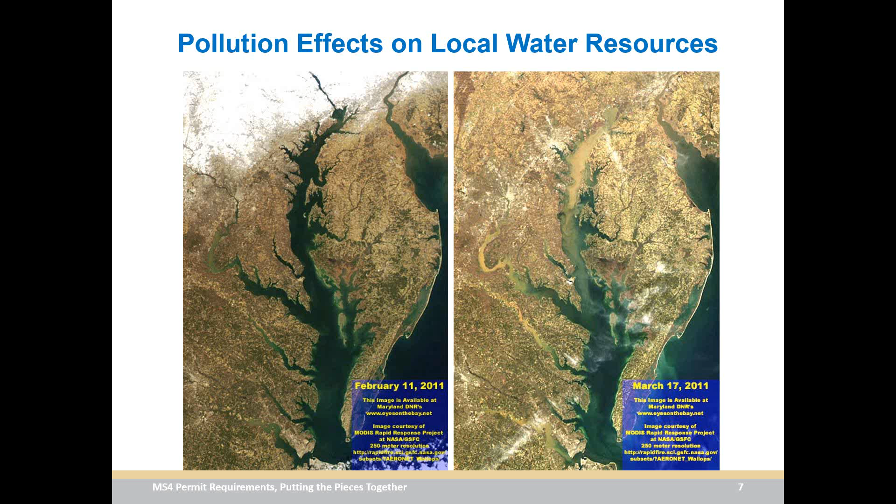This is just a great shot of the bay from a couple years ago, before and after a major event, and you can see just from left to right the amount of pollution and sediment that was transferred just in this one individual event.

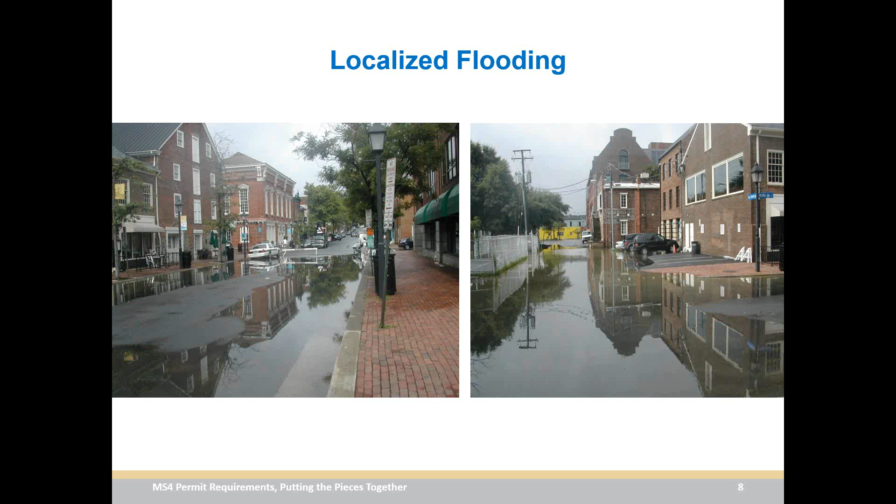So this is why. And it's not just the major flooding events, it's the localized flooding events as well. I'm sure a lot of you out there have that street that every time it rains, it's shut down, or every time you get complaints from a certain neighborhood because the basements are flooded or the inlets are clogged. Localized flooding can be a real problem in some of these municipalities.

There's also the extreme event flooding that we get. I believe these are from Tropical Storm Lee, and granted, these are a more extreme idea of what the flooding is that we're hoping to control with some of these requirements, but it's all things that as municipalities we're thinking about and we're concerned about.

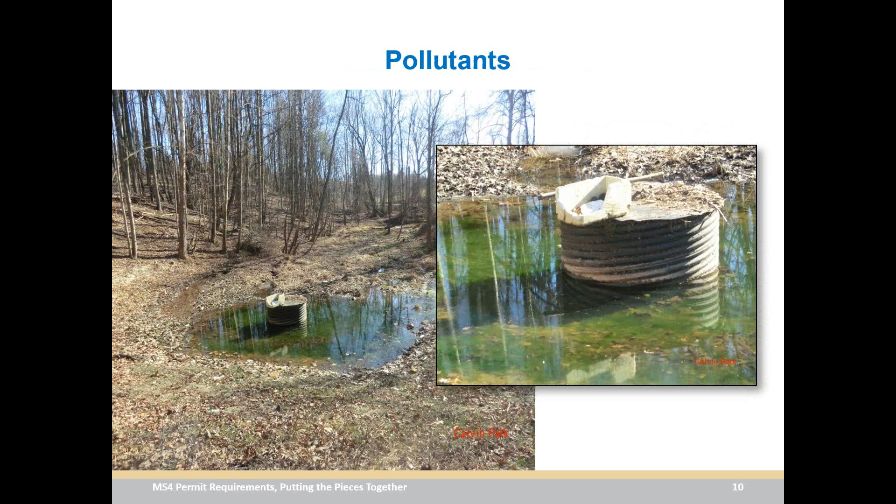But like I mentioned before, one of the big things we're going to talk about today is the pollutants. I took this picture for a client, and we still never figured out what all that green stuff was around their riser, but at this point I'm not sure I want to know. But the point is you've got a lot of things going on in your streams.

You're going to have a lot of sediment buildup in a lot of your facilities, and the question is, what steps can we take as municipalities to really reduce this at the source, try and have less water, less pollutants, because it's going to be a lot cheaper to deal with it at the source than it is to try and remove things afterwards. That costs a lot more money, and by the time things get to the bay, we're just talking about such a massive quantity that it's not going to make sense.

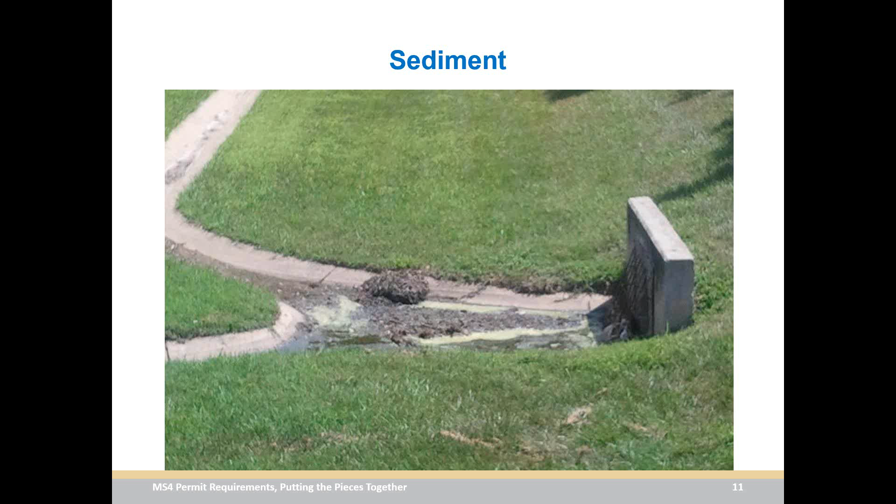We really need to be looking individually in our own backyards and our municipalities to see what's going on. So a lot of you are already looking at your watersheds in Pennsylvania. You're already trying to do your assessment to figure out what your goals are. And some of them are a little more obvious than others.

You want to improve your water quality. You don't want to have as many pollutants. You want to reduce the flooding that you get, that localized flooding we talked about from your common rain events. And it's not just about repairing the troubled areas at this point, but you also want to protect the areas that are still good.

And obviously, we do have a lot of regulatory requirements, so we're going to do that. But when you put all these things together, all of us are really looking at improving the overall watershed health in our municipalities, because that does help benefit the Chesapeake Bay as well.

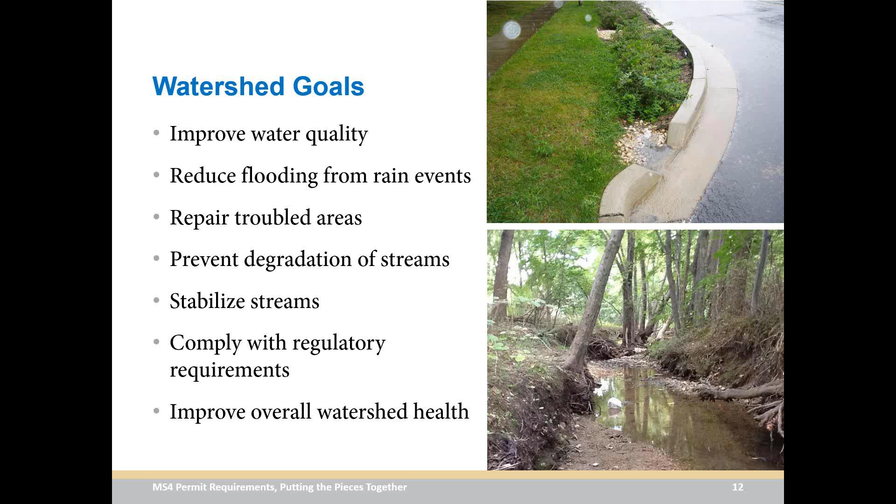So what are the benefits to having a strong stormwater program? Well, these are just some of the ones that we've found that are important to folks in Pennsylvania. Fishing and boating and recreation, these are all things that people enjoy. And we're not going to dwell too much on these because, as a lot of you know, it's not just about meeting the requirements. It's also about doing the things that benefit your community as a whole.

And when you have improved environment, that's generally when it tends to be improved economic situations as well. So it's important to a lot of people for a lot of reasons.

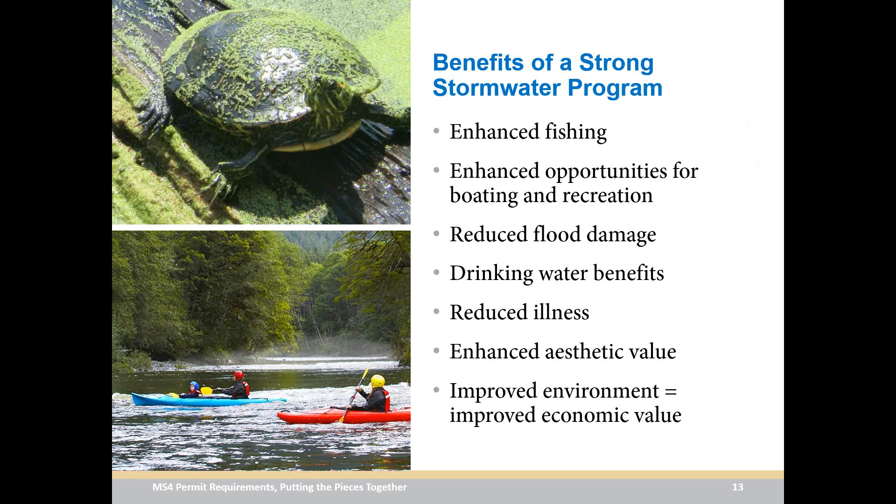So since we are in a regulatory environment and we are talking about MS4 permits, let's get in and see why it is that we want to do this. In Pennsylvania, your NPDES permit is administered by the Pennsylvania DEP. And you can see here we've got a lot of regulatory requirements starting at the very big umbrella of the EPA Clean Water Act and really coming down to some of your local requirements.

Now, because we're talking about Pennsylvania's new MS4 permit for smaller communities and municipalities, there are going to be two things that we're going to focus on later that are different from before. That's the Chesapeake Bay Total Maximum Daily Load, or TMDL, requirements in the form of a pollutant reduction plan. You can tell we love acronyms in this business. So when you hear me talk about the TMDL, that's basically the pollution diet that the Chesapeake Bay has been put on.

When you hear us talk about PRPs, or pollutant reduction plans, those are things you'll specifically develop as part of your permit to meet those requirements. Pennsylvania also did a watershed implementation plan that we're going to discuss. That's how they break it down by state and municipality. We're also going to talk about some local TMDL plans, because some of you probably have TMDLs on streams that have nothing to do with the bay. Maybe you have one for bacteria, maybe a different one for sediment or PCBs. We're going to talk about those as well. But these basically give you the regulatory requirements that are driving a lot of the actions the municipalities are going to be taking.

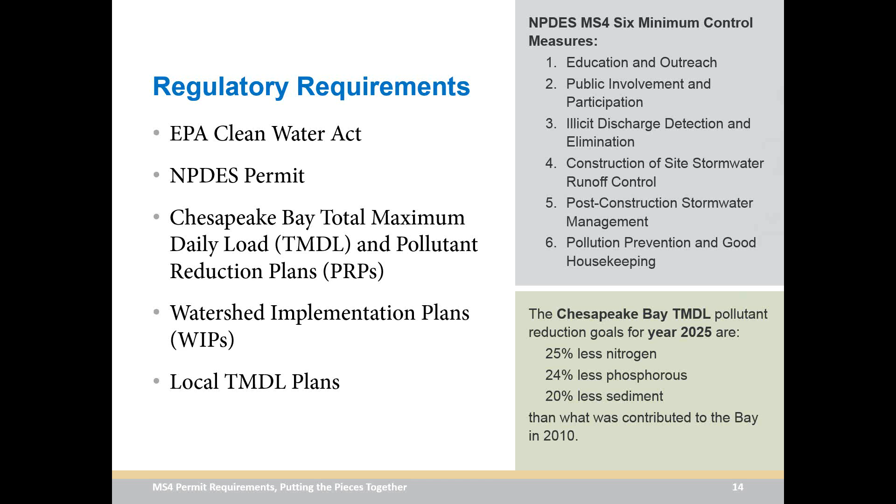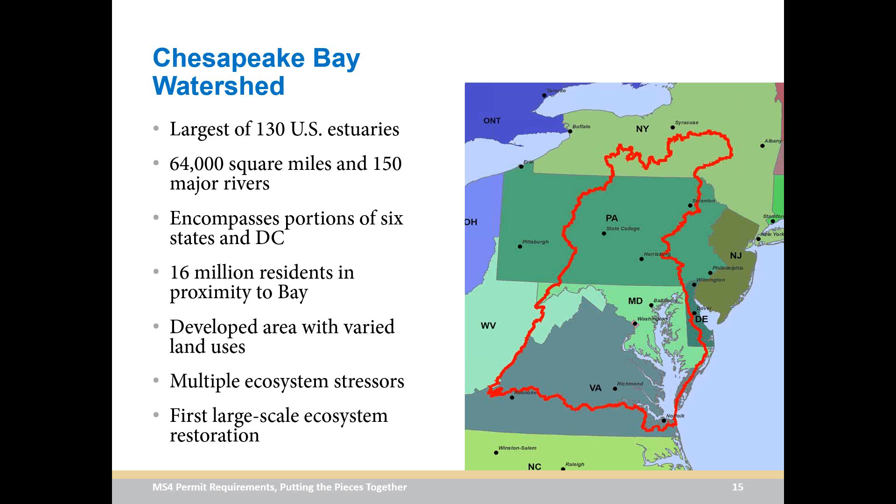Now, this is nothing new. There's been a lot of restoration efforts in the bay to date, starting back in the 30s and leading up to today when we talked about this Chesapeake Bay TMDL coming out. The important thing I hope you can take away from today is what this Chesapeake Bay pollution diet is. What this means is, back in 2010, when everybody, the 6 states and the District of Columbia, agreed on this TMDL, there are 3 things they said they were going to put the bay on a diet for: sediment, nitrogen, and phosphorus. So those are really the pollutants of concern when you're talking about the bay TMDL.

And you, in Pennsylvania, your MS4 permit is going to help you figure out how to comply with the requirements of that Chesapeake Bay TMDL. Pennsylvania is not unique in this. A lot of the other states are also putting their Chesapeake Bay requirements out through the MS4 permits, because it's the most effective mechanism they've found for getting people to comply and getting everybody on the same page with their reporting and requirements.

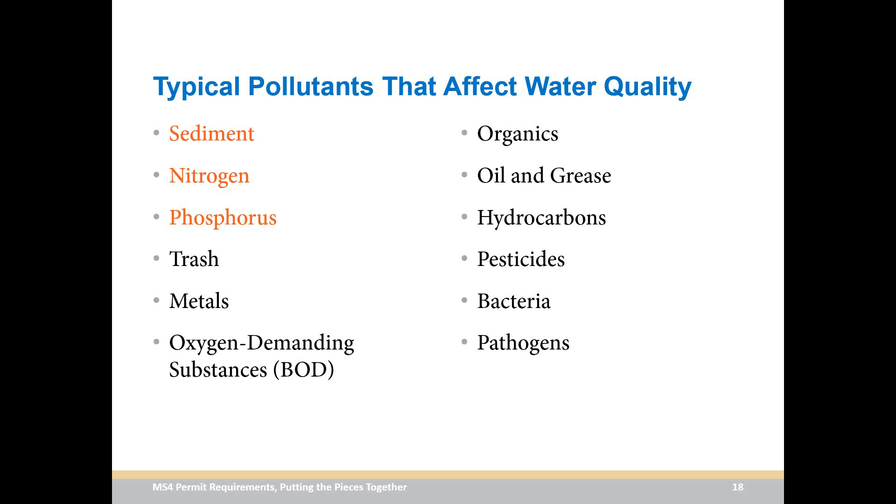So there are other pollutants that can affect what's going on in the bay. Like I said, I've highlighted those top 3, but you also might have some other ones that you either have a TMDL for or just know you're concerned about. Everybody's concerned about trash. Sometimes you'll see people with TMDLs for bacteria, maybe some other organics. But these are typically the things we're looking at when we go in and do a watershed assessment to see what's affecting your water quality.

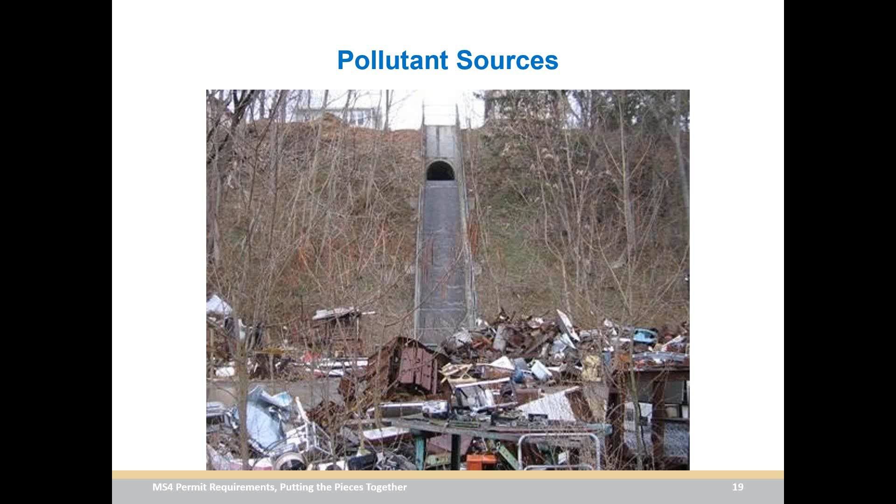So anybody out there have an outfall that looks like this? I hope not, and I don't remember exactly where this picture was taken, but I hope they've cleaned it up a little bit by now. This is more commonly what we see after the big rain events, and you've got a lot of stuff going on. I think probably all of you have had an outfall that looks like this at one point.

So in keeping up with the Chesapeake Bay TMDL milestones, these are for the entire program, so they have target reductions to get to by 2025. But the more important piece are the reductions by 2017. What they're basically telling the states is they want 60% of those BMPs that you're going to put in place to get these reductions implemented by 2017. And then everybody's going to have these reporting milestones every 2 years. They're going to be giving annual reports based on your pollutant reduction plan and complying with the WIP. So those are some of the big milestones that, again, will be spelled out in your permit.

The WIP, or Watershed Implementation Plan, that you heard me mention is something Pennsylvania has also participated in. Again, they're not alone, a lot of states have done this. But it's basically a roadmap to show how we're going to get to where we need to be by 2025, with those interim dates of 2017. There's a great website that shows the planning targets for Pennsylvania. So this is something you could check out, these are just some of the examples we have from some of the municipalities we dealt with recently.

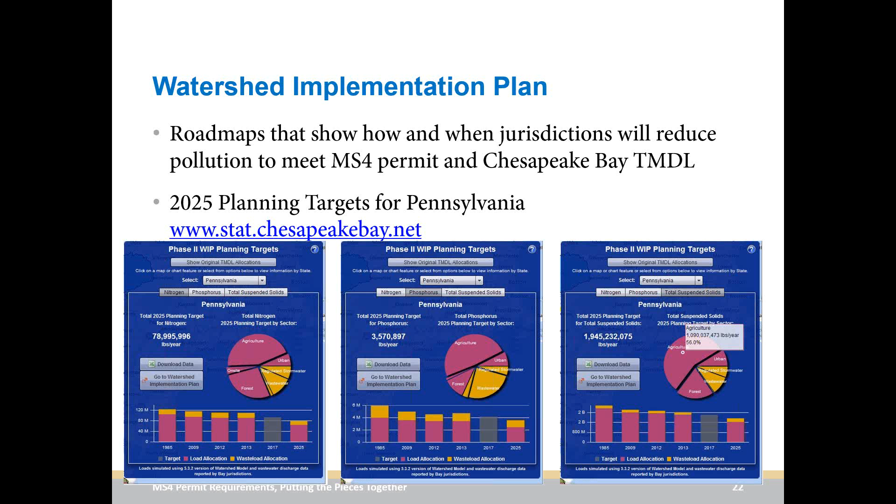So within the WIP, you get some county-level planning targets as well. These were developed by DEP, and they're guidance for how you're going to achieve what everybody's trying to achieve. They're currently pretty flexible. DEP is not requiring specifics on a lot of these, but it's important for you to know what your waste load allocations are, how they're going to be subdivided. Basically, you're going to want to tackle the low-hanging fruit first.

Not one of my favorite expressions, but it's true. You want to really try and see what you can achieve right off the bat for the least amount of money, and then you move on to some of the other things that you need to do on these planning targets.

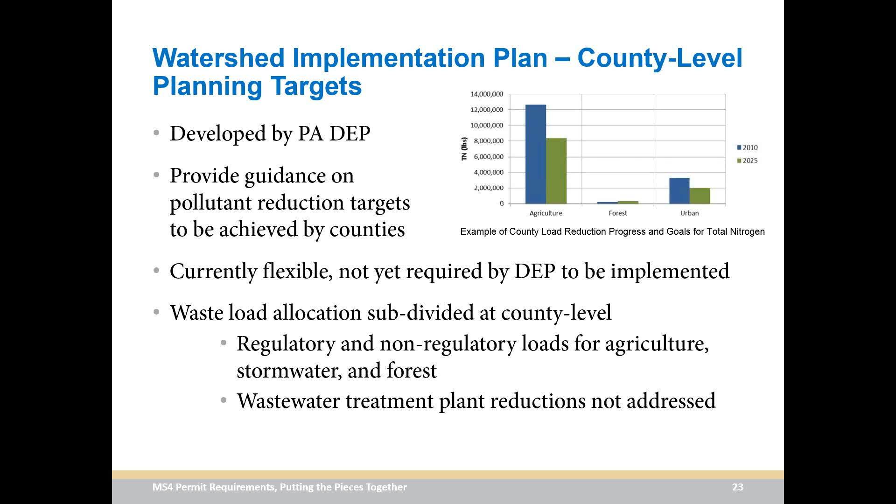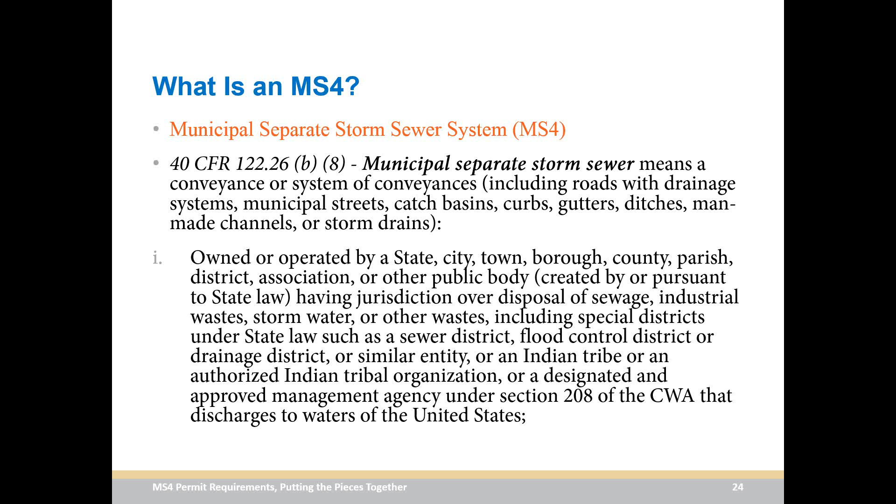So this slide I left up here because it's completely obnoxious as far as the definition of what is an MS4. You've heard us talk about this MS4 permit. So it's a municipal separate storm sewer permit. And as you can see, that means you have a conveyance, and there's a whole bunch of things, criteria that go along with it. And again, I left all these words up there just to show you that there is a pretty lengthy definition, but the bottom line is it's defined in your permit as the portion of the MS4 located within a designated urbanized area, and it's designated by DEP.

So if you have questions about whether you are an MS4, whether you're still an MS4, whether you used to be an MS4, those are things that you're going to want to contact your local DEP representative to discuss. But for the purposes of this webinar, we're going to assume that everybody here has an MS4 that they're concerned about.

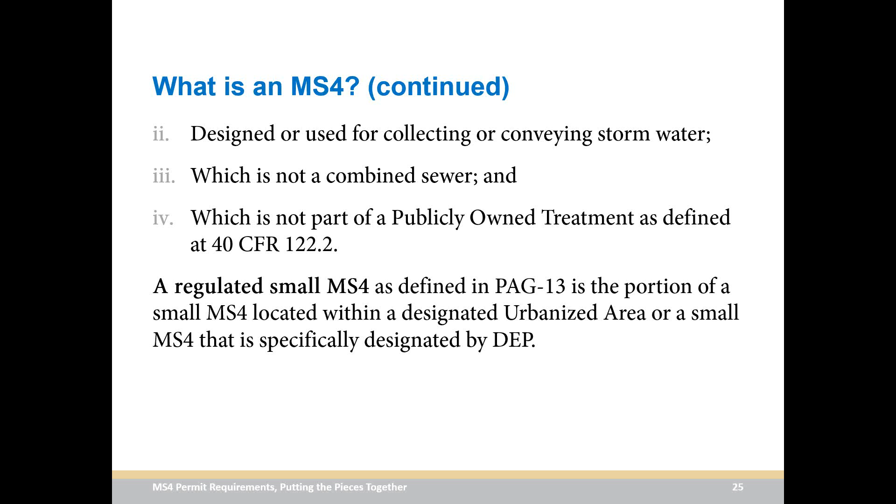Another question we get a lot from clients is, what is an outfall? Now again, you need to use the definition in your permit, but what you can ask yourself is, do I have a point source? Is it discharging from my MS4, and is it discharging into the waters of Pennsylvania or waters of the U.S.? And if you answered yes to these, then it's an outfall. If you aren't sure, again, I'm going to refer you to DEP for their guidance because they are the ones that are administering your program.

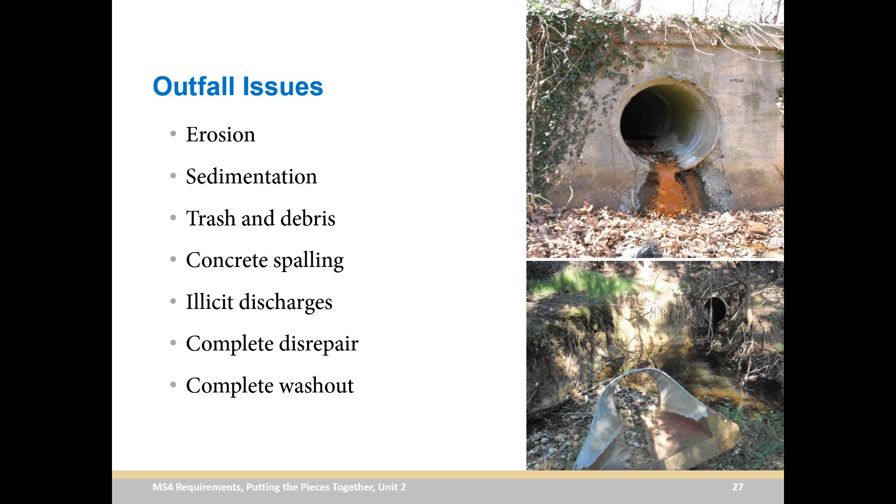Just some examples of some outfalls that are not in the greatest of shape. A lot of outfall issues that we will see, you get erosion around them, you get a lot of sediment deposition because of the things that are coming out, trash and debris because anything that's in those pipes is eventually going to dump out right there in your stream, and then you will get some that are in complete disrepair. But these outfall issues should clue you into the fact that you've got some things going on upstream that we need to be worried about.

So going back to the MS4 permit, what you're going to hear us talk a lot today about is the Phase 2 general permit, and that's for the smaller municipalities. Who needs one? Probably you do. Again, if you're in an MS4 area, and we're going to stick with that for the purposes of today, you most likely need one.

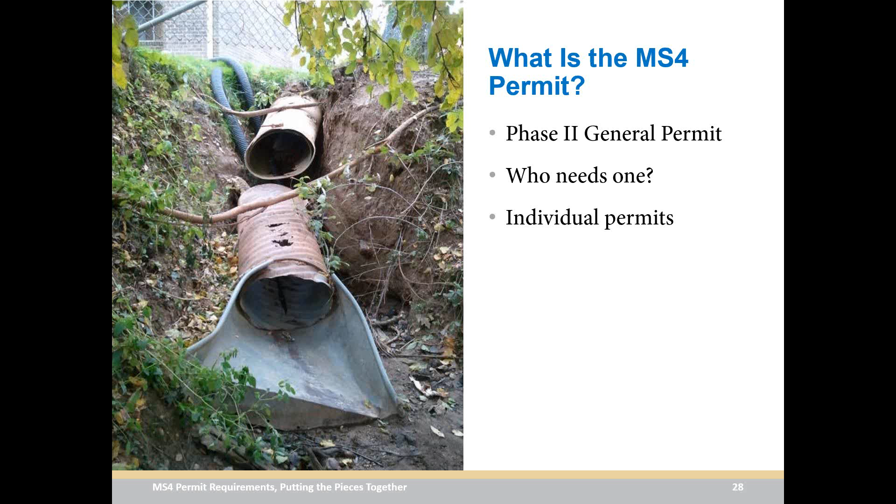Now, there are also individual permits that Pennsylvania administers. Most likely you already know if you're required to have an individual permit if you have some special protection areas, or if there's anything significant about the waters that you're discharging. You probably already know if you need an individual permit. Again, you can always check with DEP if you're not sure.

And this new permit, what does it require? We're going to talk about implementing a strong stormwater management program. Important that you track progress toward the goals of your program, and you've got to report that progress. I had someone say to me once, if you don't write it down, it didn't happen. So it's really important that you're tracking this progress towards your goals and reporting it in your annual reports to DEP. And it's going to take more labor hours than before, not just for the reporting, but for the maintenance, the upkeep, the O&M, the work. So it's just something that when you're planning your budgets, you're going to need to be prepared for.

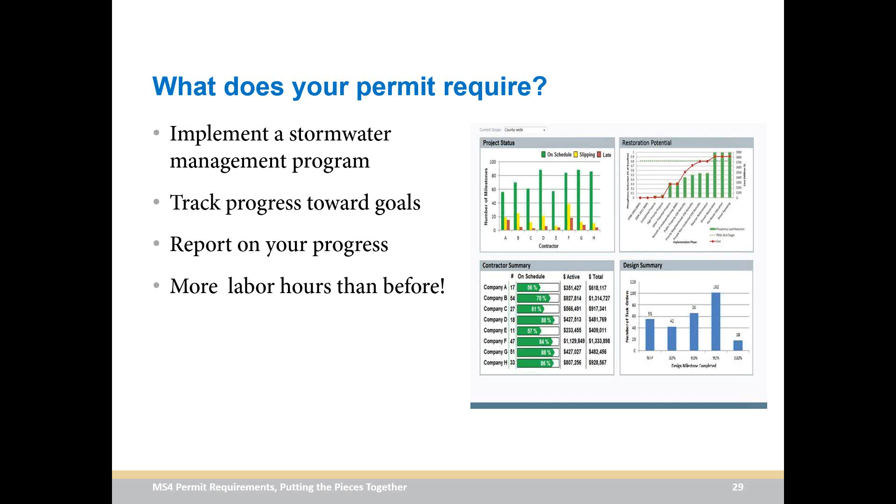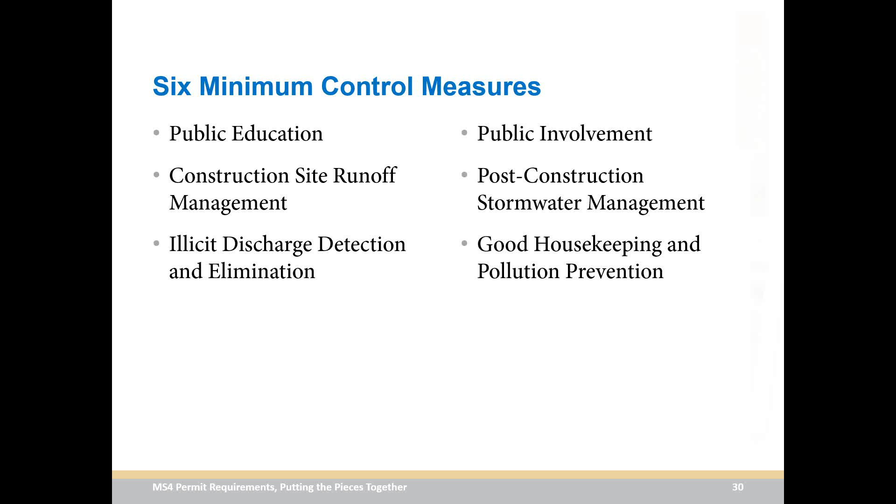I was just going to go quickly over the 6 minimum control measures. These were in your existing MS4 permit. So these are not new to you. The new things are what we're going to talk about after this. So let me quickly go through these. The first one being public education and outreach.

There are lots of ways you can develop outreach for your communities, but the important thing is to make sure that you keep track of what you're doing and report it in accordance with your permit. Whether it's the number of flyers you distributed at the local county fair or the number of homeowners you met with at certain meetings, you want to make sure you're keeping track.

Public involvement and participation is another great one, especially if you have volunteer programs that you maybe already have started or you're thinking about starting. The important thing is you want to do them not only because it's a great opportunity to get stakeholders to buy into what you're trying to achieve, but make sure you're reporting and keeping track of the meetings you're having, storm drains that are stenciled, and any events you have so that you can report that and get credit for it in your permit.

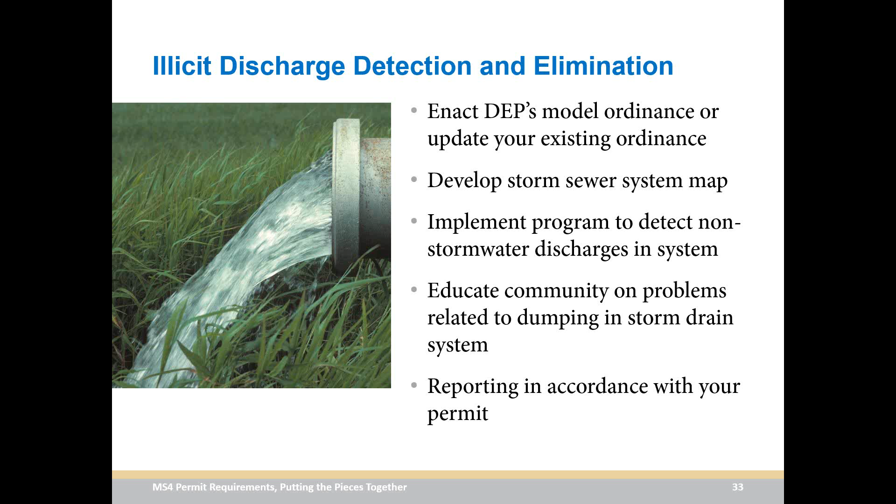I won't talk too much about illicit discharges because we could obviously spend an hour on those, but basically if you've got water coming out of your pipes when it's not raining, there's a possibility that you have an illicit discharge. You're going to need to track that with your sewer mapping. You want to make sure you report it, and if it turns out to be an education issue, you can fold that back into one of your other measures because you need to make sure people are no longer doing the activities causing this illicit discharge.

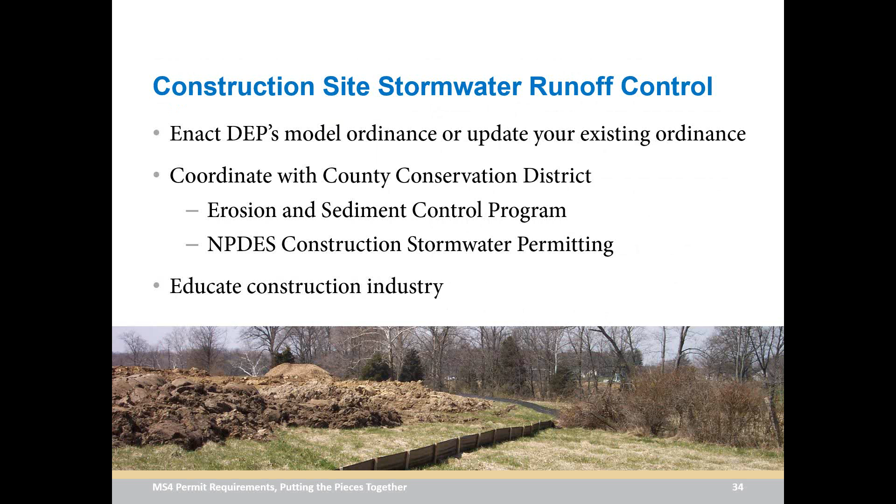Construction site stormwater runoff is obviously another big concern because we all know what it looks like when you get a big open construction site. The silt fence can only do so much. So it's all about education on this one, making sure your ordinances are in place and keeping track of what you're doing. Same thing with post-construction.

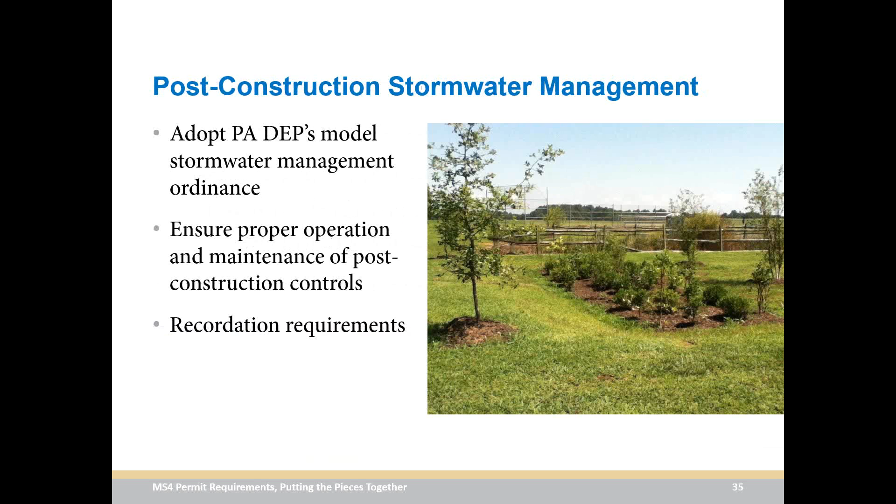Anything that needs to be recorded with your post-construction erosion and sediment control, you want to make sure you're keeping track of that, and this will keep you in compliance with the 6 minimum measures. Good housekeeping is the last one.

This is the one that everybody always seems to have the best intentions on, but it's also the easiest one for things to slip through the cracks. Making sure your employees are trained, educating anybody that's on your site and in the community, and again, reporting in accordance with your permit. This covers a lot.

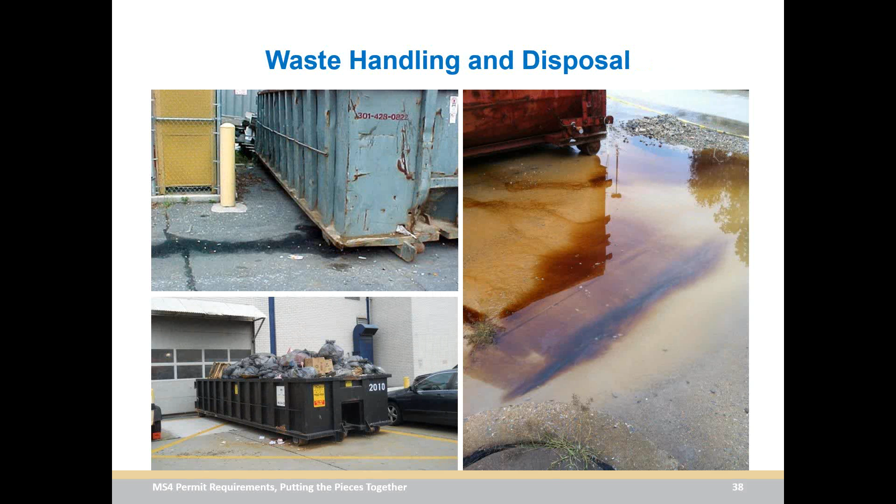I threw some photos in here just to show you whether you have equipment parking, if you're a bus depot, if you've got dumpsters on your site, maybe you're doing waste handling and disposal. There's always something here that you can improve your good housekeeping on.

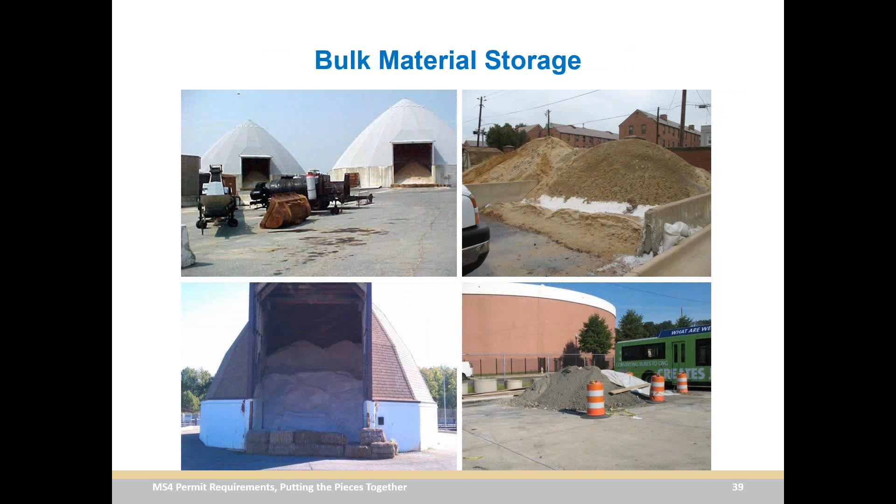At this time of year, sand, salt, cinders—I'm sure nobody even wants to think about that anymore. I think we're all ready for spring. But the point is there's always going to be things on your site that are worth taking a look at to make sure you're using the best housekeeping practices.

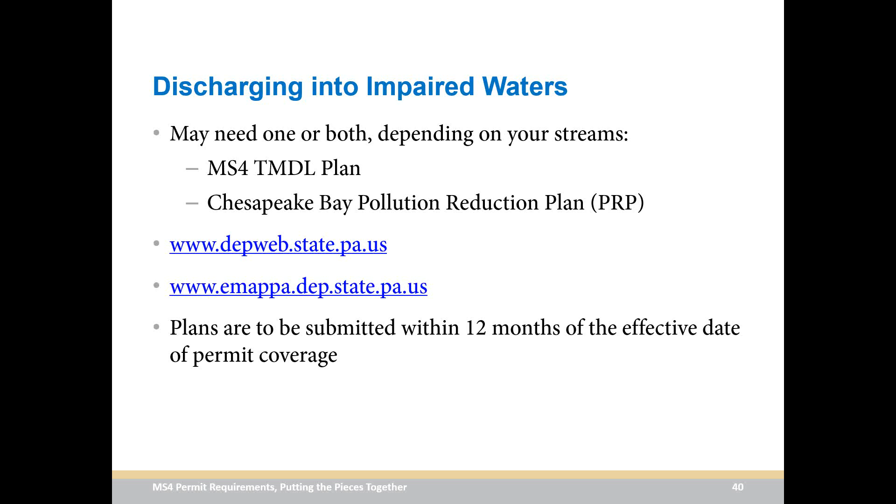The big thing you'll want to remember here is that you've got about 12 months from the effective date of your permit to put these in place. Everybody's permit effective date is going to be different because it depends on when you actually apply for coverage.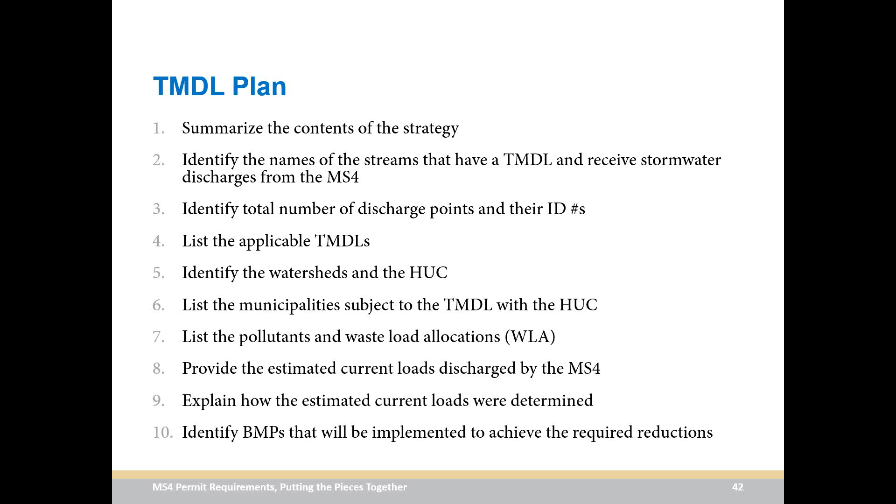If you do need a TMDL plan for an individual TMDL, you're going to want to put this plan together and describe how you're going to achieve your goals. You also need a strategy and some design details for how you're going to accomplish this. The permit lists very specific steps for how you can develop this plan. If you have questions on this, DEP is going to be your best bet since they are administering this, but it's worth your while to go through these steps based on where you are in your municipality and see where you need to be.

The Chesapeake Bay PRP is a little different. You're going to have to do similar steps, but these are all going to be related to the bay drainage and the estimate of what you're currently contributing and how you can fix that.

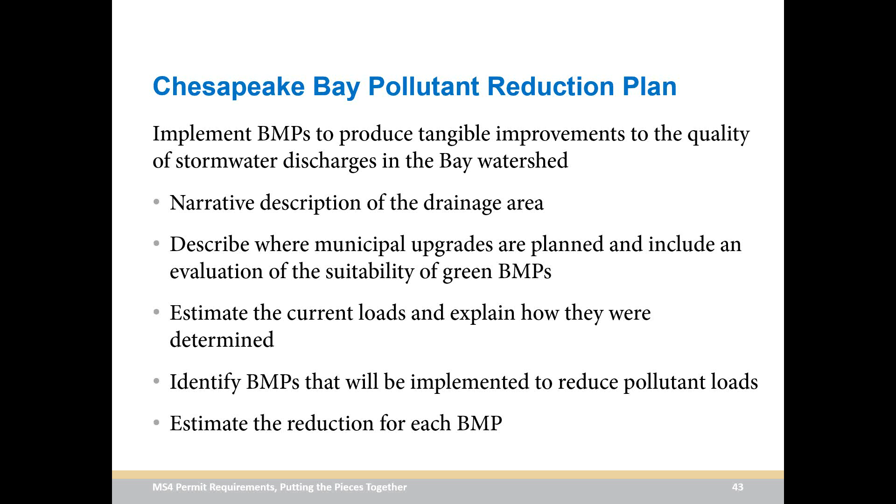So the next question we get from everybody is, how do I take on these challenges? And I'm going to let Andy discuss some of these with you.

Good afternoon. I think Melissa did a great job talking about your stormwater plan as well as some of your permit requirements. I'm going to start off talking about potential challenges. When we were out there doing our information gathering and input seminars with the local municipalities, one thing that came up quite frequently was property ownership. What am I responsible for?

If the outfall is on somebody's private property, do I have to monitor that outfall? Or if I'm doing pollutant reduction, how do I achieve a level of pollutant reduction simply by addressing issues in the right-of-way or municipal-owned properties? So if you look here, the first three bullets speak to property issues associated with stormwater. As a municipality, your stormwater implementation, retrofit opportunities, and maintenance plans are often limited by property ownership issues. Maintenance agreements, access easements, and enforcement protocols are ways to ensure these types of facilities are maintained properly.

Many of the new pollutant reduction requirements are difficult to meet, especially when you're limited to those public rights-of-way and municipal-owned properties. One way to address this is homeowner and business incentive programs. It's a different approach that increases the opportunities for new and retrofit facilities. Obviously, these work better if there's a financial driver behind it, like a stormwater fee or a stormwater utility. The last bullet is what we all end up talking about, which is funding, and perhaps the greatest challenge in this whole puzzle is finding the money to do these things.

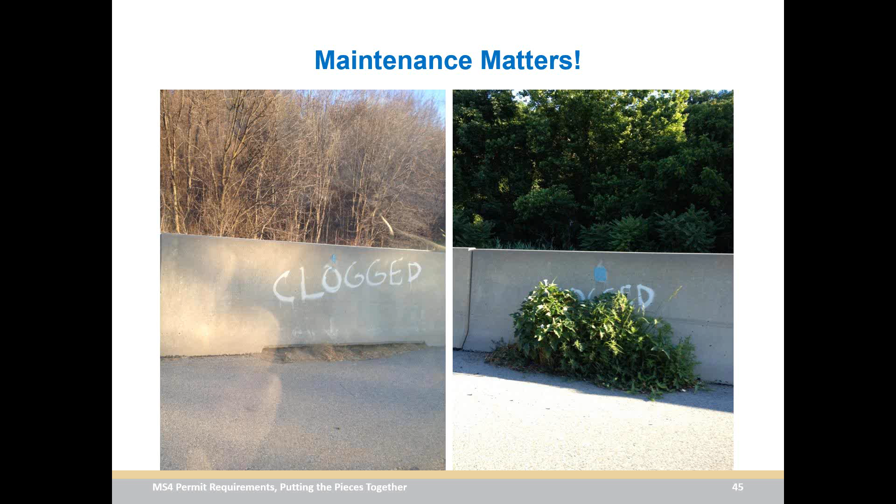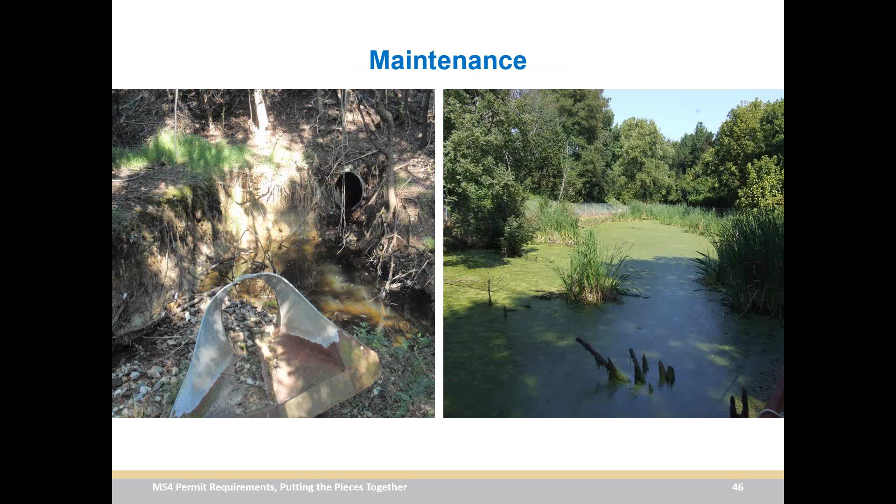As a municipality, as Melissa and I will demonstrate later and talk about later, an ounce of prevention is worth a pound of cure. Take care of it ahead of time, and you will never have to replace it, or hopefully you won't have to replace it. These pictures show some extreme examples of inlets and outfalls that have been neglected, but unfortunately they're not that rare. Non-functioning infrastructure is ineffective at serving its purpose, and in turn these types of things become contributors to polluted runoff.

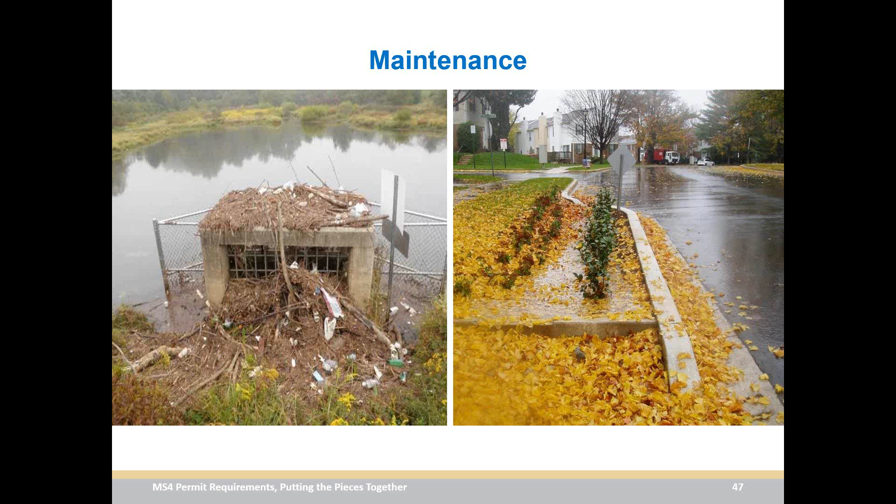The picture on the right is a prime example of good intentions. You have a great-looking, well, what would be a great-looking green infrastructure practice. I'm sure the town spent a lot of money on design and implementation of this flow-through device, but what they really got now is a really expensive leaf catcher. This facility isn't going to function because it hasn't been maintained. So in this instance, the O&M plan for this type of facility should take into account seasonal variations.

All right, so let's talk a little bit about potential solutions. We're going to talk about potential solutions in the context of developing and maintaining a strong stormwater program. Most obvious is the traditional capital improvement plans that fund gray and green improvements. However, as we all know, given the tight budgets that many municipalities face today, this budgetary line item is usually insufficient to address many associated issues.

Pollution prevention, I just talked about a little bit, but we're going to keep hammering away on it. It's far cheaper to prevent your water pollution than it is to treat it afterwards. By developing and implementing strategies to prevent, you'll be saving your town money in the long run.

The next bullet, I'll just say share the burden. Coordinate with your other local jurisdictions. Coordination can create cost savings by optimizing manpower, equipment, and materials. Talk to your neighboring towns or boroughs about a coordinated effort to tackle big problems on small budgets.

Aside from O&M, the other thing you'll hear repeated time and time again is education and outreach. Melissa's already said it several times, and I'll probably say it several more. Education and outreach is key to any effective stormwater program. We need to facilitate operational and behavioral changes.

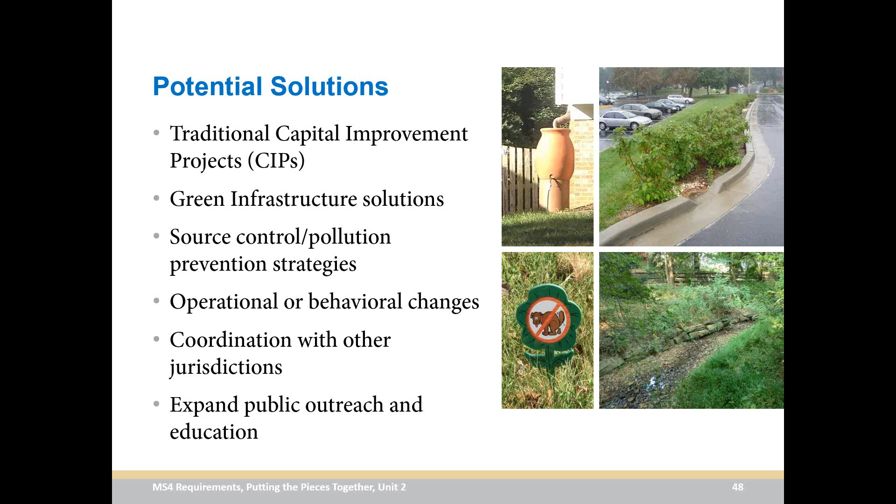These are some of the more traditional or common stormwater practices. I'm sure a lot of you out there have seen these. We'll talk a little bit about their function and purpose, and we'll talk about some of the basic do's and don'ts of maintaining them.

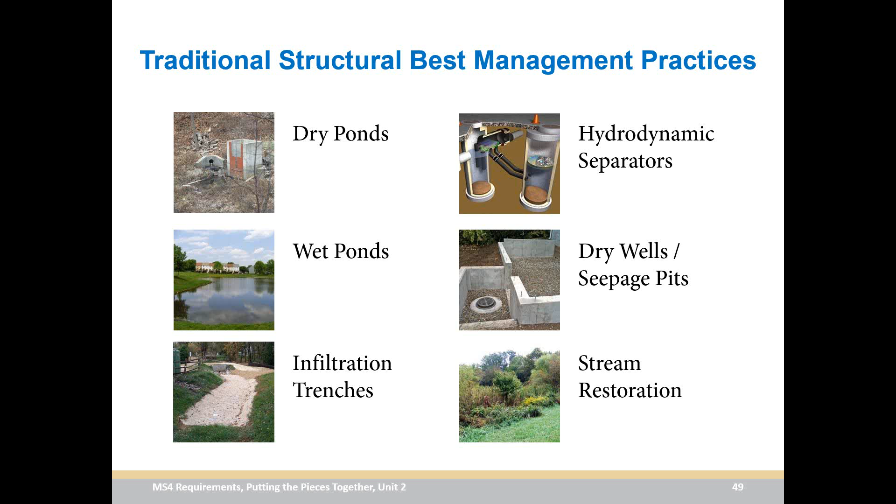From a pollution prevention standpoint, and I'll use another term Melissa doesn't like, it's low-hanging fruit. These are the low-hanging fruit of the retrofit opportunities. Our company currently works for various local and state agencies evaluating these types of facilities for retrofit opportunities. They are quite frequently the biggest bang for the buck.

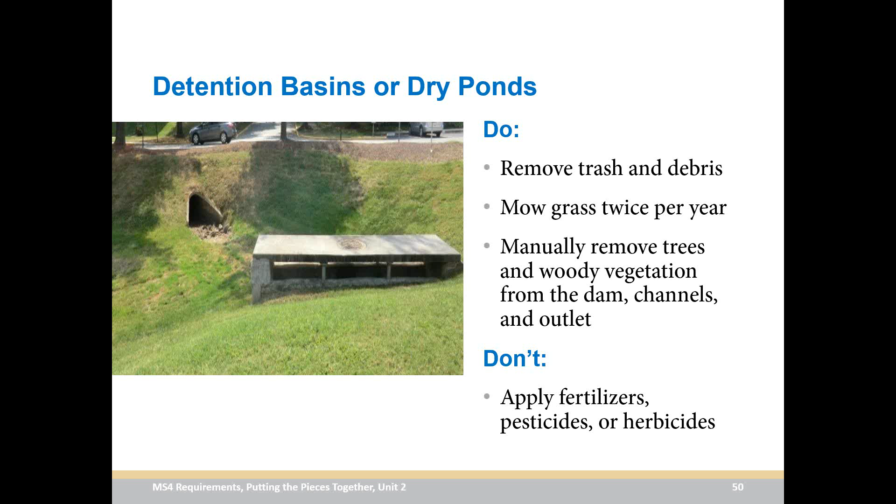All right, step up from your dry ponds to your wet ponds. Wet ponds provide both quantity and quality management. Now, the maintenance for these types of facilities is a little more cumbersome, but if you go through the do's, it's pretty common sense. The dry pond to wet pond conversion is something you may want to consider when you're talking pollution prevention or pollution reduction plans.

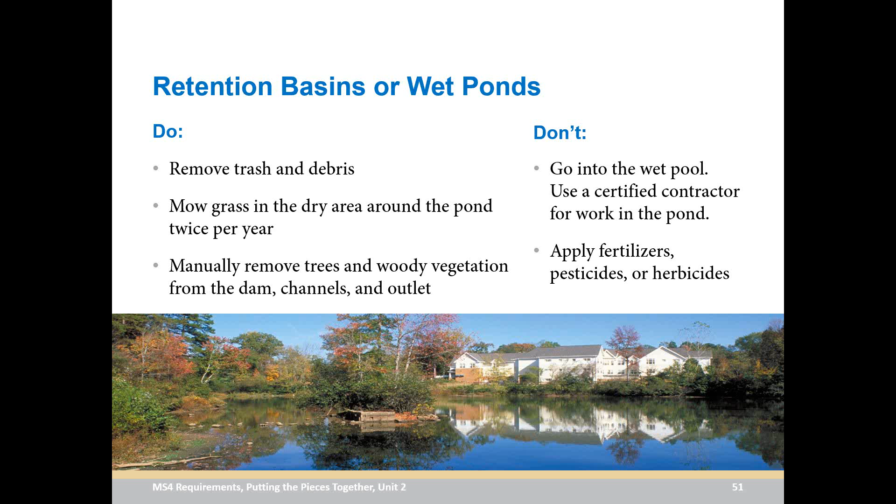Infiltration trenches, you've probably seen these. Sometimes they can be mistaken for a riprap channel. Infiltration trenches are generally sized for the first flush or 1 year frequency storm events. They're generally easy to construct. However, their functionality is going to depend on their placement and what's upstream of the facility. These facilities provide water quality through groundwater recharge. The maintenance protocols, again, I would ask you to read those. Maintenance protocols require a hands-on approach for removal of sediment and vegetation.

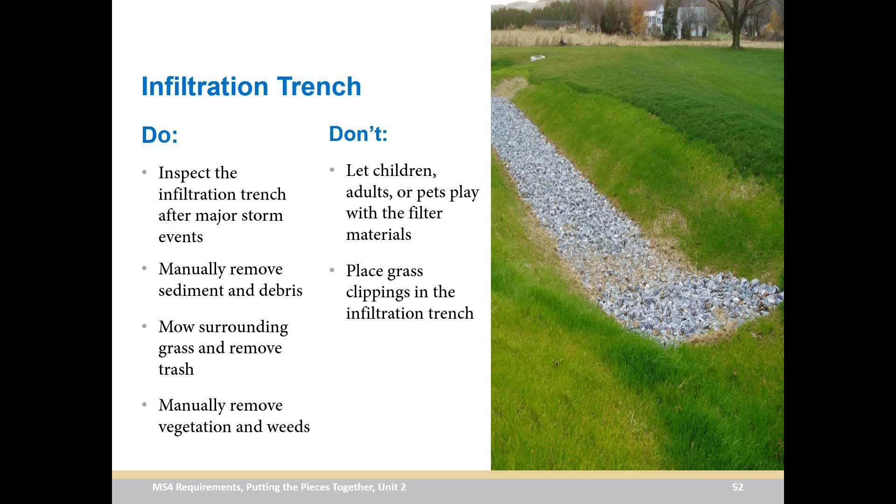Don't let children or even adults play in them. If any of you out there are parents, you know the easiest way to break something is to let your kids play in it. So let's move on to the next one.

Hydrodynamic separators. You may or may not have familiarity with these. These vault or manhole-sized devices can come in many proprietary forms. They're separators, and they do just that. They pull out the sediments and oils and greases from your stormwater runoff. Most of them have a defined maintenance program depending on who you buy them from, and oftentimes these companies will sell a maintenance package along with the unit. Generally, these are offline facilities taking first flush or small 1 year events. As with any kind of underground or formal vault type system, the upfront costs here are a limiting factor.

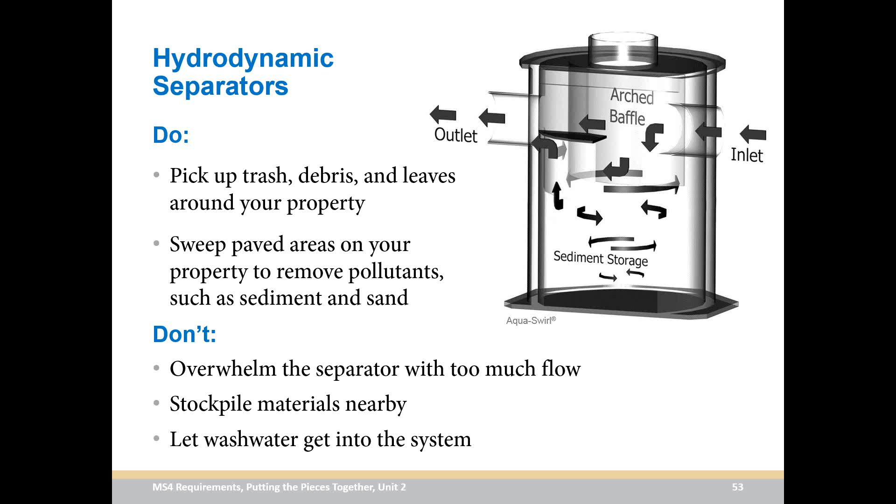Dry well / seepage pit, we'll refer to it as dry well, seepage pit, just a less appealing term. I'm sure everybody's seen these. These facilities are just smaller versions of infiltration trenches, and they become more commonplace in residential applications, serving your rooftop downspouts. Small dry wells have become very commonplace. Educating homeowners, here we talk about public education and outreach. Educating the homeowners is critical to increasing the continued functions of these types of facilities. So in this instance, you've combined O&M with your education and outreach.

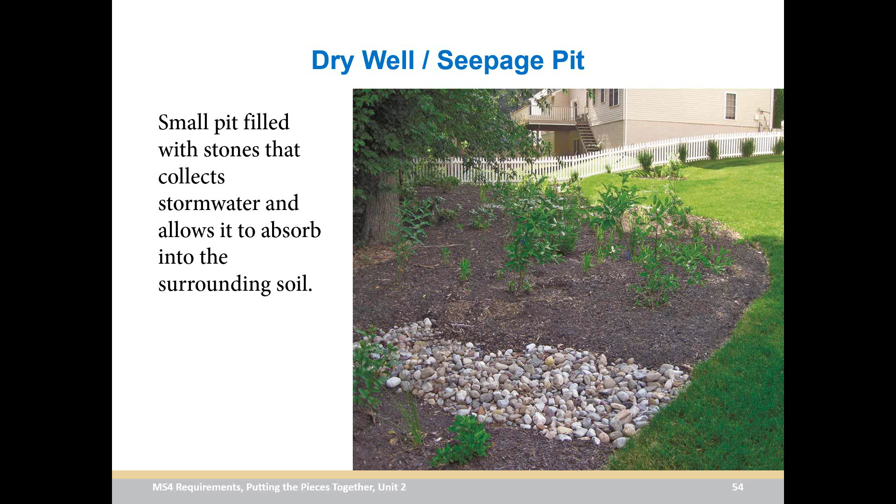There's your do's and don'ts. Again, nothing overly complicated.

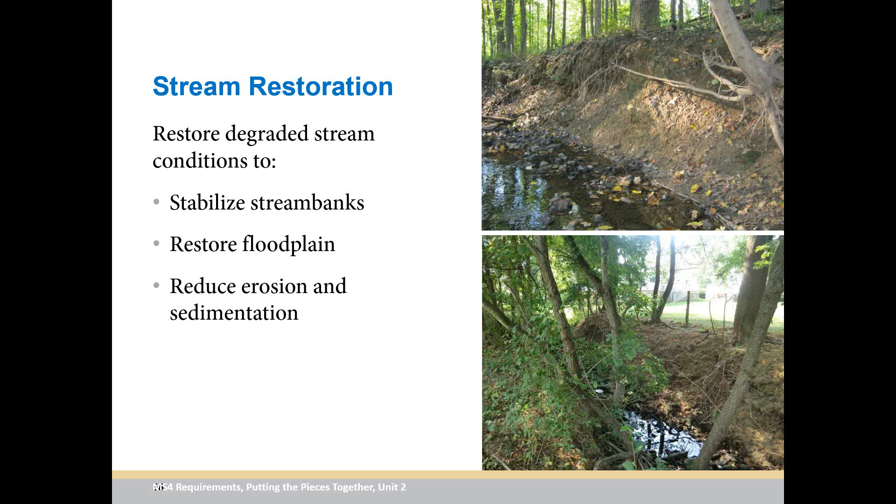Stream restoration. Let's talk a little bit about that. Stream restoration is not always thought about as a stormwater BMP. Aside from the aesthetic benefits, these types of projects reduce sediment transmission and can be done in conjunction with floodplain restoration. Associated landscaping and buffer planting components provide additional nutrient reductions.

Here's a nice picture, this is post-construction, obviously. Our office does a lot of these related to asset management, but the water quality benefit you get from these is undeniable. For anybody out there listening in Lancaster County, if you want to use this as an excuse, you can head to the Conestoga Country Club and see the improvements they made to the little Conestoga that runs through their property.

Something similar to what you see here. You have a J-hook or a cross vane, and you have some bank stabilization. And with that, I'm going to turn it back over to Melissa.

Thanks, Andy. I'm going to take us through some of our green infrastructure slides. This is near and dear to my heart because it's something I do for a lot of clients. A lot of people ask the first question: what is green infrastructure?

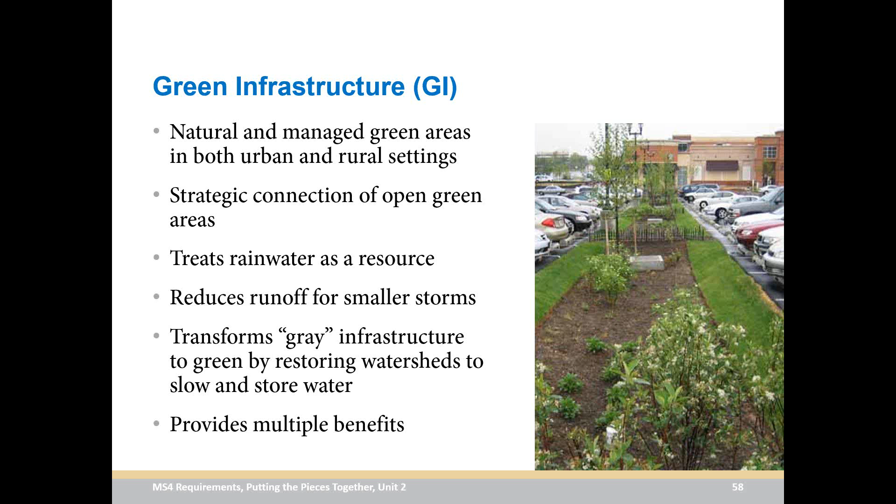In the context of today, we're talking about stormwater green infrastructure and reconnecting that stormwater to the ground through infiltration or to other green areas, restoring the watershed by doing that. There are multiple benefits to this. What it is not today is anything to do with green buildings, carbon footprint, or energy efficiency. We're just going to focus on stormwater for today.

There are lots of green alternatives that are gaining popularity. I've seen a lot of municipalities coming up with their own green streets or green alleys programs. A lot of the green alleys, I think, are modeled after what was done in Chicago, but there are some great municipalities in Pennsylvania and Maryland that have started doing those.

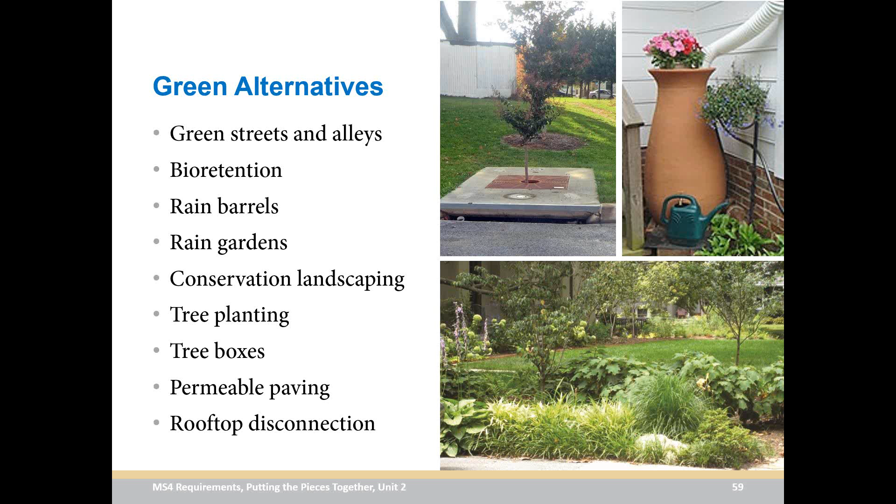Bioretention is always popular, people love plants. But people are also realizing that they want to be reusing this rainwater as a resource instead of just trying to get it off their property as fast as they can. So we're going to go through a couple of these that might be attractive to you as municipalities as you're going through and trying to find alternatives at the site level as you're looking at your watersheds.

Bioretention gardens have been very effective, especially in road rights-of-way. The picture there is one we did where we were actually using flat under drains like they use on golf courses. They proved to be a pretty popular alternative for dealing with any overflow we'd get from these bioretentions.

So the important thing to remember here is that these are designed. You're not just digging a hole and putting plants in the ground. You really want to make sure you have the right engineered design with these, and they can be very effective, and they can look great as well.

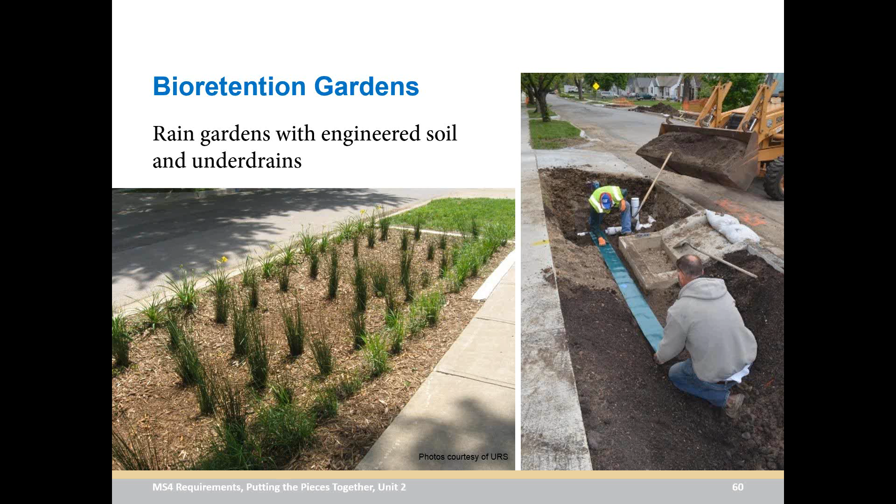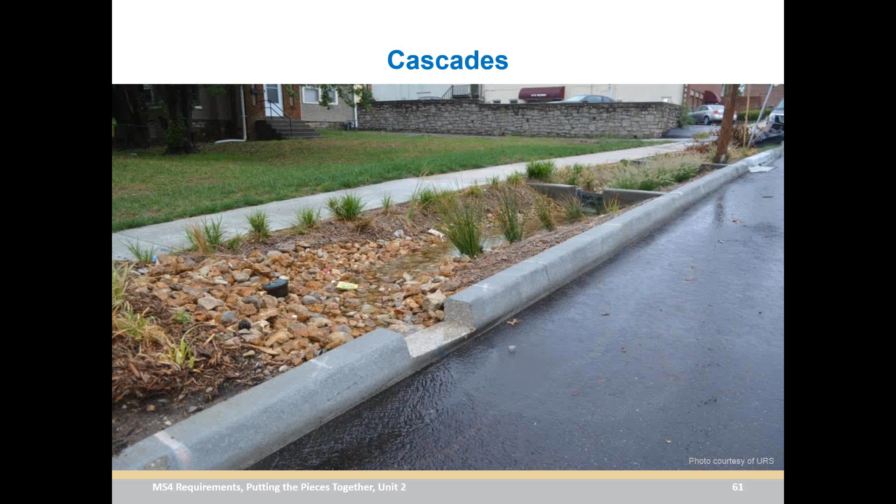If you have areas with steep slopes, we've had clients really enjoy cascades because it slows the flow down and allows for the infiltration. I will say cascades can be more expensive because of the amount of concrete used in the weirs. We've had some clients get creative and use plastic or wooden weirs to help out in the same capacity. But again, very popular in road rights-of-way.

This is something we're seeing more municipal clients and clients in ultra-urban areas attracted to: curb extensions or curb bump outs, whatever you prefer to call them locally, with below-grade storage. Because if you've got clayey soil in some of your areas, you know you're not going to get a great infiltration rate without some help. Rather than doing soil amendments in this particular area, they decided to do below-grade storage.

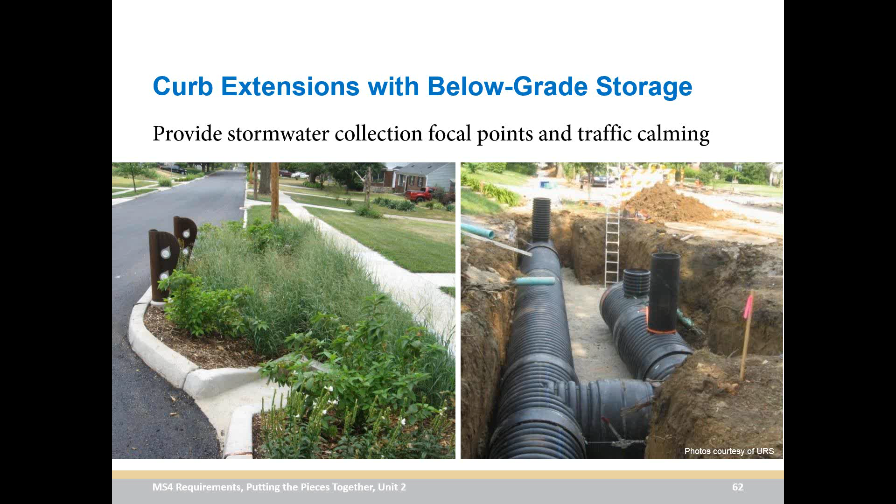The bump out provided some vegetation. It also provided traffic calming. It was a neighborhood enhancement, plus it really was a great way of dealing with the stormwater.

Just some quick bioretention maintenance do's and don'ts. Something I will say here is when you're working with contractors who aren't used to doing green infrastructure, you do need a little extra training. Whether it's reminding them not to park the backhoe in the rain garden overnight when they're in between doing things on the construction site, or not compacting the soil when they're building it. There are all sorts of things, and you're kind of going to have to be flexible and learn as you go on some of these designs because they really are site-specific.

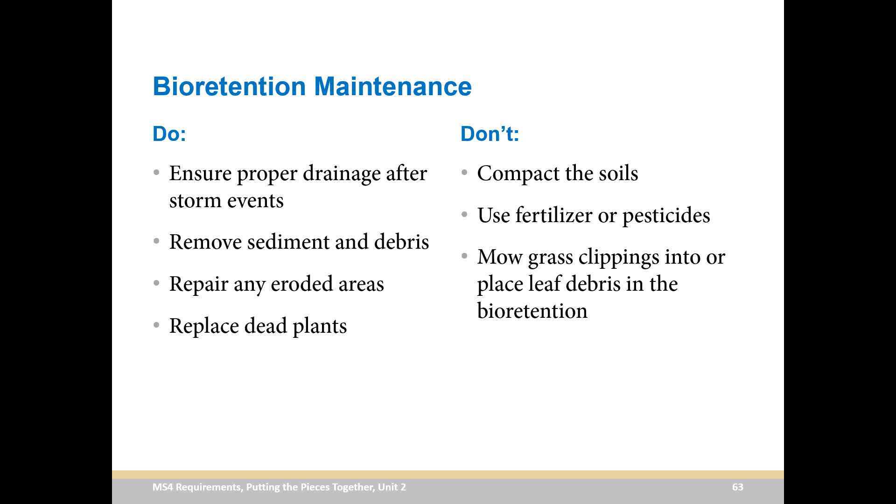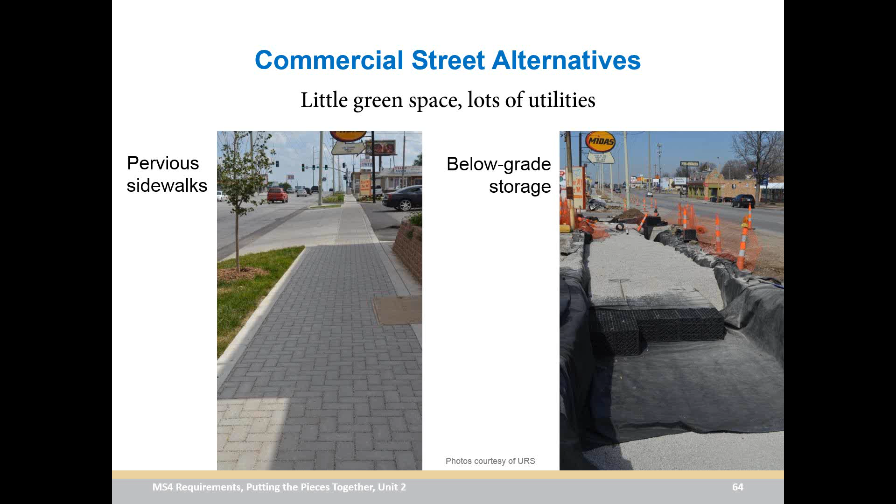These are just some examples of commercial street alternatives that we've done. We've had great luck with clients when they're doing pervious sidewalks or permeable pavers over top of storage because, again, you're getting the infiltration, and if you don't have good soil infiltration rates, you can kind of store it and then release it at a later time.

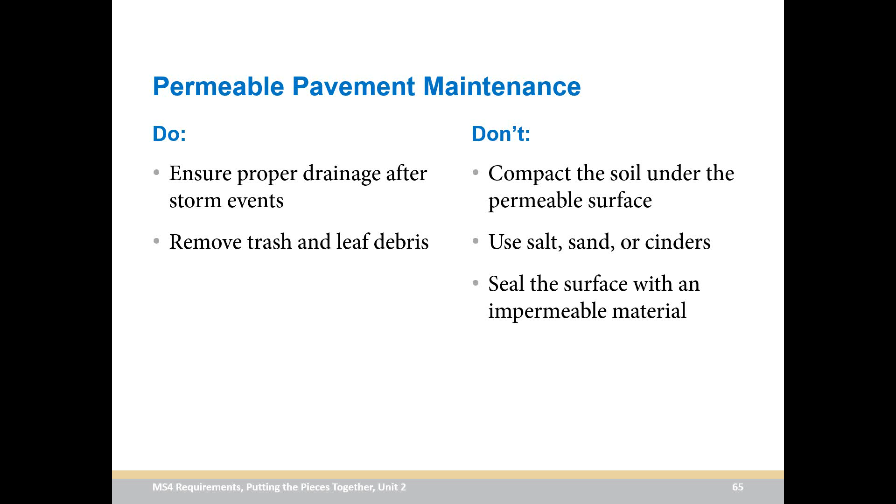The maintenance is pretty self-explanatory on these. You really don't want to have permeable pavements next to a lot of leaf debris like Andy showed before, because then you just have a leaf catcher and a green BMP that isn't very effective.

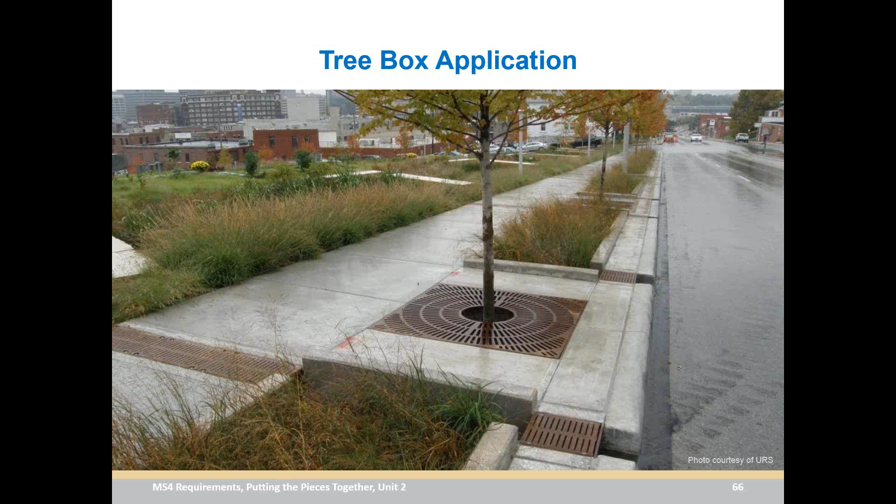Tree boxes—a lot of people like tree boxes. I know some people are concerned about having the trees completely encased in concrete, so we have seen open bottom tree box applications, but either way it adds great landscaping to your streets. Trees provide such a valuable resource, not just for stormwater, but for air quality, for shade, for heat island effects. There's all sorts of great things about tree boxes as long as you take care of them.

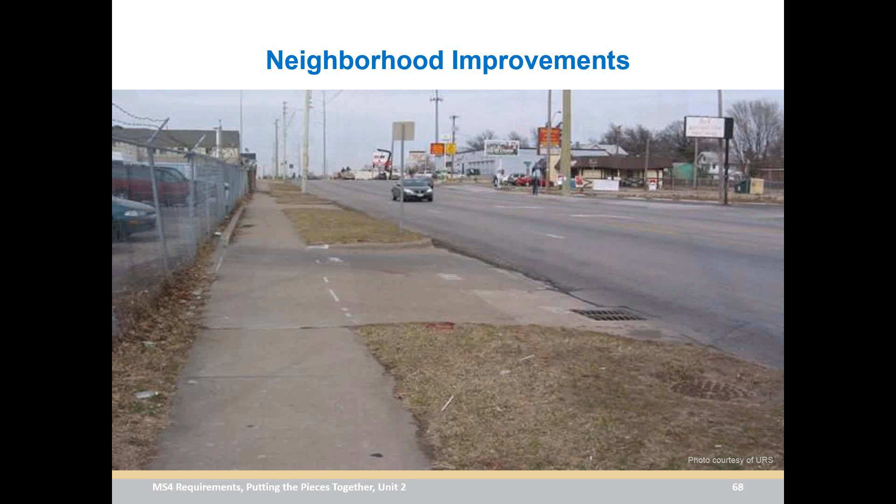There are a lot of other green infrastructure techniques that we've seen used on private properties. Rain gardens have become very popular, especially when you can get some of the beautiful native plantings.

A lot more people are also looking into rain barrels, so that when they have droughts, when we get some of these really warm, humid summers and we don't want to be spending the money to draw the water out of our tap to water our gardens and our vegetables and everything else, you can use some of the water from the rain barrels.

Green roofs, maybe not as popular in residential applications yet, unless it's on a smaller shed or a flat roof in the back, but a lot of commercial properties are starting to realize that having a green roof can be a benefit to their employees. People like to look out the window and see it. If it's a roof that's accessible to others, they can add benches and it becomes an amenity for the employees, somewhere else to go have your lunch other than the break room that's next to everybody's cubicle.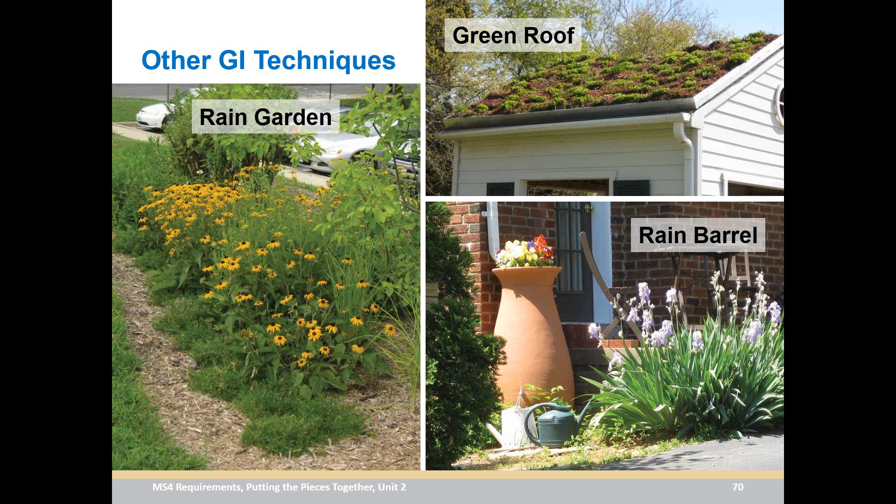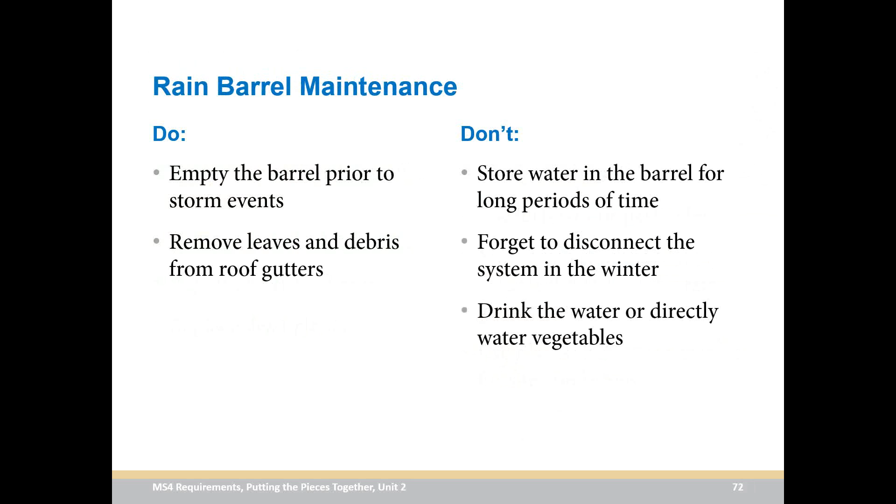Again, the maintenance is very similar to the bioretention, so I won't read this to you. And the rain barrels, again, the most important thing here is to make sure that you're not getting a lot of gunk into it, and to make sure that you don't let it freeze over the winter and wreck everything.

The last thing I'll say about green infrastructure is that the O&M is a little different, but it's also critical to the success of these BMPs. The maintenance program you have now for your traditional BMPs is probably going to need to be tweaked a bit so that it can keep up with the maintenance that you're going to need for this green infrastructure.

It's a great way to do education and outreach with private property owners. We've had a lot of success in doing that with clients where they have incentives for people to implement green infrastructure on their private property, and it really does make a difference in the watershed as a whole.

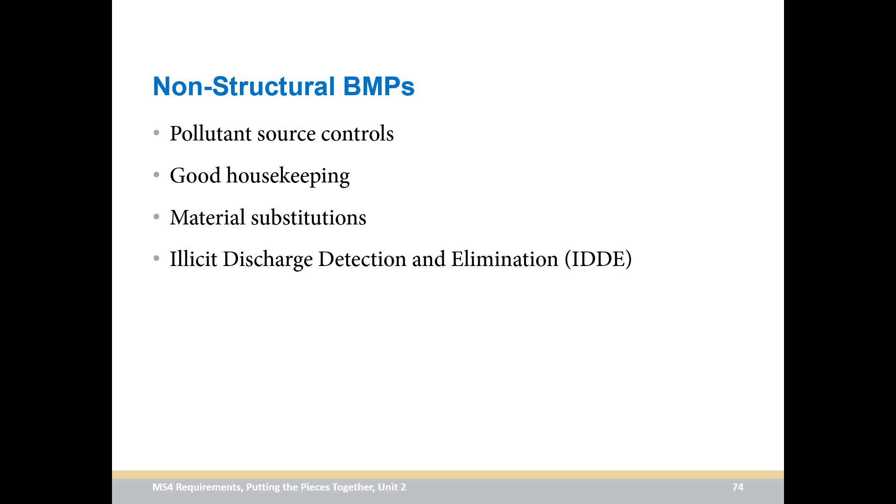You can also look for non-structural BMPs. For those of you that are going to be on our webinar next Wednesday where we're talking about BMP pollutant removal efficiencies, you can also look at non-structural things, whether it's different source controls you're doing, IDDE, or some sort of good housekeeping. You can also get credit for these, but as Andy mentioned, it's a lot of times a lot easier and cheaper to do it before than to try and do it after.

Operational strategies are another thing that we can talk about, because I think when you have an area-wide management plan or you really have a public education strategy that goes municipality-wide, you can make changes to your operations that can help others make the changes to what they're doing.

But I'll harp on this one last time, because reporting is so very important to make sure that you are keeping track of what you're doing so you can get credit for it and see how effective your programs are being.

One last thing I want to talk about is putting it all together, because I think this is really important, and it's a comment that we get from a lot of municipalities - if only our departments were talking to each other. Then when we have a curb and gutter project or a road repaving or a sidewalk project, we could implement some green infrastructure or some stormwater management at that point.

Unfortunately, I think in a lot of municipalities, they're waiting until the last minute, until we're getting more final design plans and you're ready to go to E&S review, and that's when the stormwater folks are coming in to look at it. So if we can really get people identifying these opportunities earlier on, I think you're going to have a successful way of doing these, and then you can save some money because you're already out there doing the work.

And one last thing I'll say is that tracking progress is very important. You've got to keep records of what you're doing. You got to know what to track, and you want to learn as you go what the most effective ways are. And the big thing everybody wants to talk about is, how am I going to pay for this? So I'm going to let Andy take us home with a discussion of funding opportunities.

Stormwater utilities, oh boy. If you've been anywhere near Pennsylvania or Maryland and you know anything about stormwater, you know this is a hot button issue.

Similar to water or sewer user fees, a stormwater utility assesses a fee, usually based on impervious cover, to fund stormwater programs and projects required to meet the new permit requirements. For those that oppose them, it's often referred to as a rain tax, and like I said, it is a hot button issue. If you're actually interested in pursuing this, the success of any stormwater utility is going to rely greatly on public and government support ahead of time.

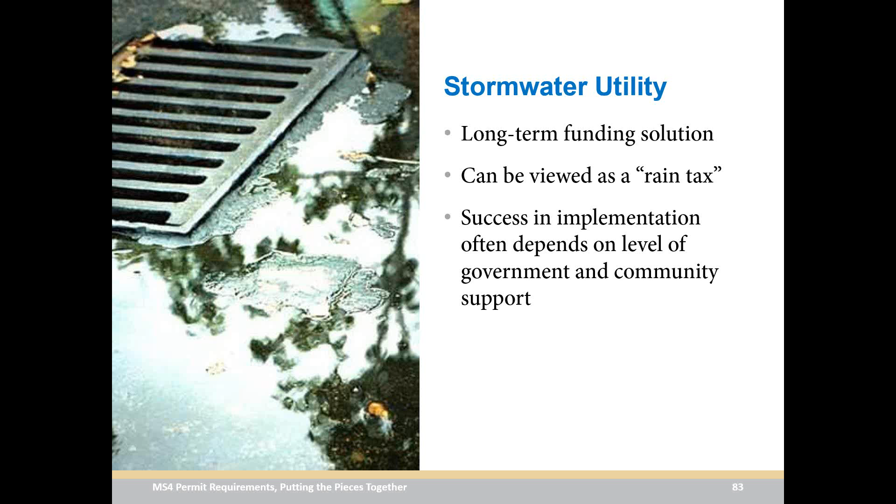Okay, the stormwater utility process, here it is in a nutshell. The stormwater utility process is aimed at determining the cost of your current stormwater service program and the cost of maintaining that, and utilizing that cost to determine the basis for potential fees. Now, as you can see, it's a process that includes outreach, financial analysis, and implementation. It's definitely something that requires a lot of grassroots level support, and hopefully you have a political advocate to help your cause.

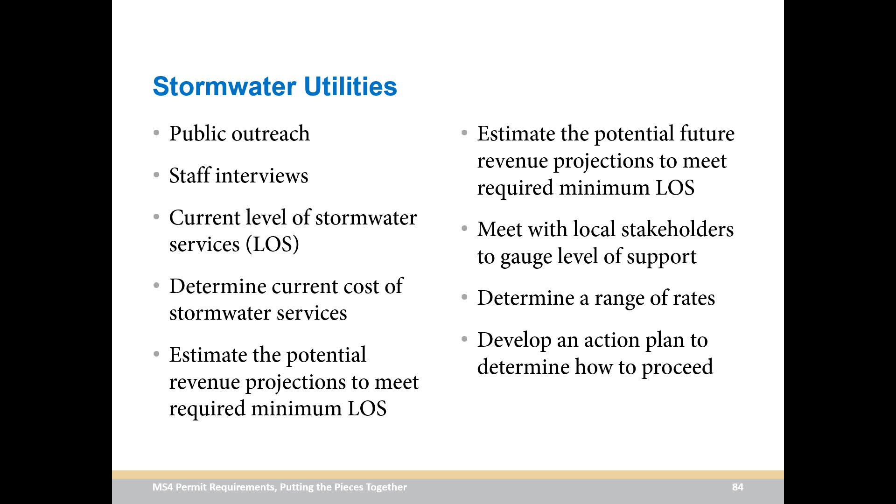Stormwater fees are very similar to the utility. However, it's a fee assessed by the town to fund stormwater projects. It's not managed by a utility authority.

Public-private partnerships. This is a different P3 than pollution prevention plan. Public-private partnerships, it's not a new concept in the business world, but it is somewhat new to the world of stormwater management. I'm just going to briefly summarize this because we could spend all day talking about this alone. A P3 typically involves a contract between a public authority and a private party in which the private party provides a public service or project that assumes substantial financial, technical, or operational risks. The government then repays that private sector over the long term if the infrastructure is built and maintained according to specifications. Again, we could spend a lot of time on this, but we're just going to glance over it for today's purposes.

So we'll talk a little bit about community assets as an alternative to getting things done. Your citizen groups, your volunteer organizations, and your local businesses are probably the most valuable assets that you have in getting these kinds of projects funded and completed. These assets can be leveraged to provide manpower, services, maintenance, and education as it relates to successfully establishing and maintaining an effective stormwater program.